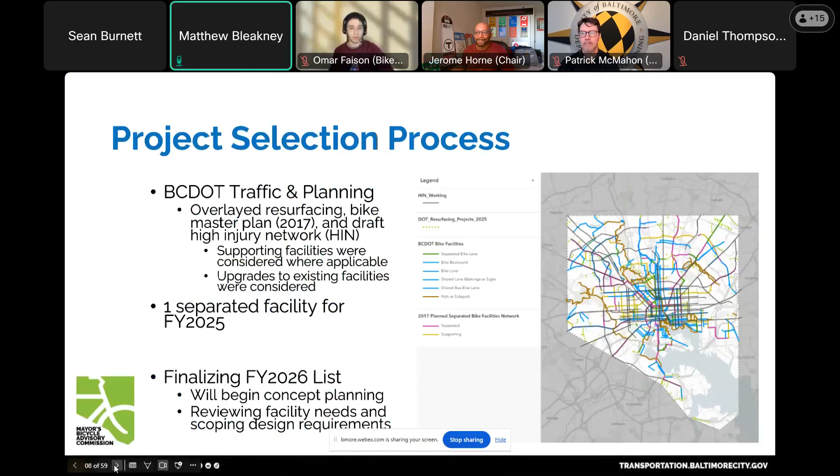All right, we'll move on to our bicycle projects overview with Sean Burnett.

Good afternoon everybody. So we're going to run through a map of some of the current projects that have to do with active transportation facilities. I wonder if we can pull that up. So as you can see, this is a nearly comprehensive list of all of the active transportation projects underway at the moment. Some of these have construction dates already.

Looking at January 27, the Mount Royal Avenue Road Diet - this is completing the portion left unconstructed by BG&E, anticipated to be completed within the next 12 months. We also have the Harford Road cycletrack extension, as well as the shared stops and bus bulbs, that will be constructed within the next 12 months.

And then you can see the next couple of projects, Greenspring, Washington, and Central Ave, right now are in various elements of late design, and we anticipate all three of those to be under construction by this time next year. The rest of these, feel free to take a screenshot, or I'm sure we're sharing this slide deck post meeting - this is a longer list of all of the projects that we have right now that are currently in some stage of design.

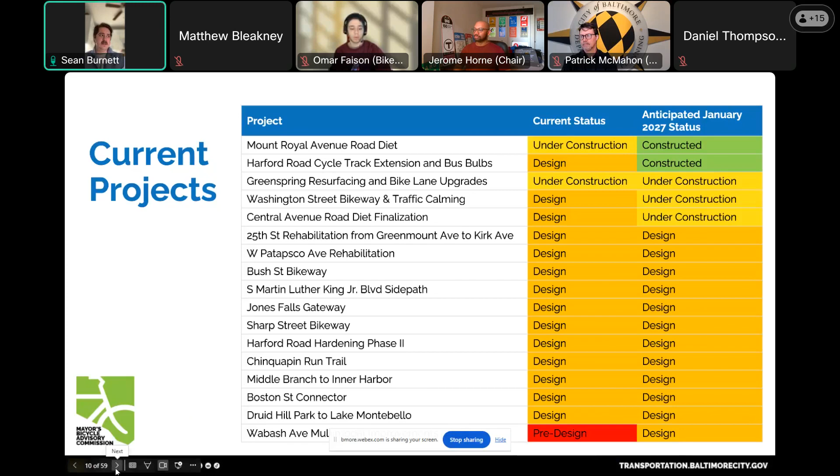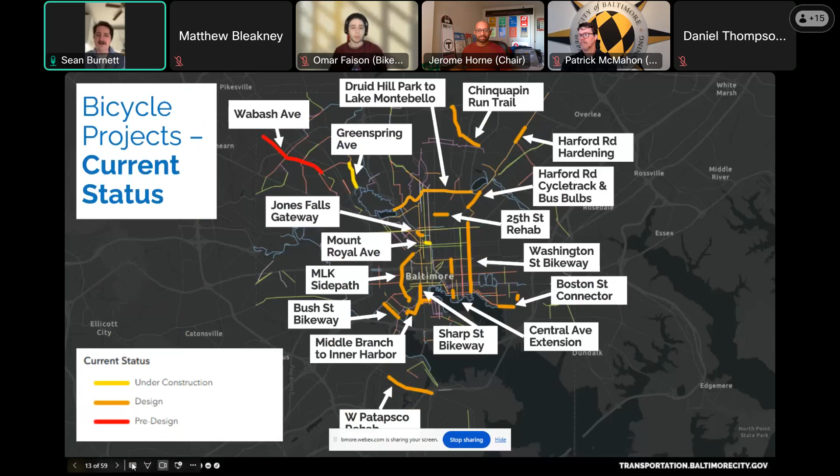Here we have an updated map of the existing bike facilities. Ms. Hanzlik and other members of our DOT team have worked hard to put this together. What's shown on screen is a map layout of the project work plan, showing all facilities currently under design or soon to be under construction, all identified. This is another accompanying map showing the anticipated status as of this time next year.

I failed to ask if anyone has questions for either Matthew or Sean related to the two items we just heard about. We'll take questions from the commissioners first.

This is Patrick. I had asked DOT to do something like this because at our last commission meeting it felt like there were updates, but they weren't necessarily connected. I think it's really helpful, and I appreciate DOT pulling this together so we have a better understanding of how the projects being developed fit within a system. But I think it also leads us to think about where things are missing and where the gaps are that we need to fill in. I won't say anything more.

Great, thank you, Patrick. Anyone else, any other commissioner comments or questions?

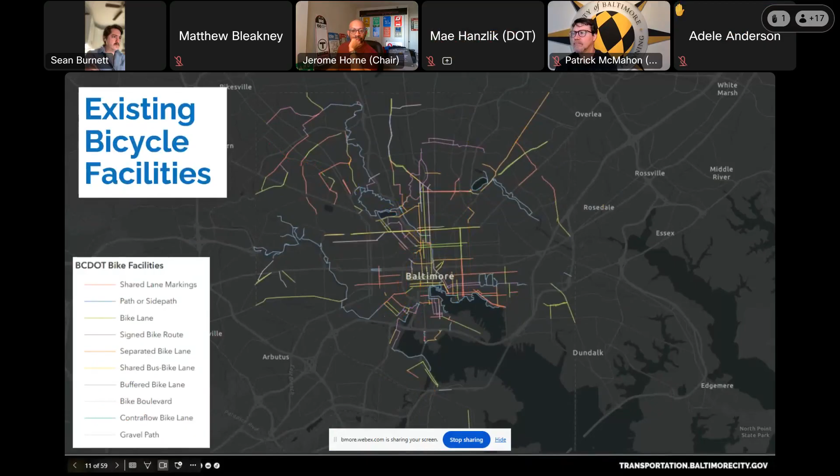Oh, thank you, that's a great question, Michelle. That's just referring to what we have existing as part of our network today. There are a variety of different types of facilities, which is why all the colors, but for this purpose we wanted to demonstrate what gaps we're anticipating filling within the next year. So the focus is really on the bigger, bolder lines in the following slides. Does that answer the question? Yeah, thanks, the slide that's up answers the question.

Okay, thanks, great. I'm also seeing in our chat that we've got Ursula and Tim. Are folks able to read what those chat messages are saying? Because on my side it says the message cannot be decrypted. I can't imagine anyone can read them. Okay, yeah, so, go ahead, go ahead, Chair. Yeah, so we have a question from Ursula.

Is there a plan to clean up all of the current and future bike lanes? If a bike facility has debris in it that would make it unusable, we would ask the community to submit that via a 311 request so our operations teams can go out and do some periodic spot cleaning. We're in the process of looking at our maintenance plan, specifically at obtaining new equipment that will make it easier to do regular cleaning of the bike lanes. But for right now, if you notice debris or obstructions, please submit that through 311 so it can be tracked and we can send our operations teams out.

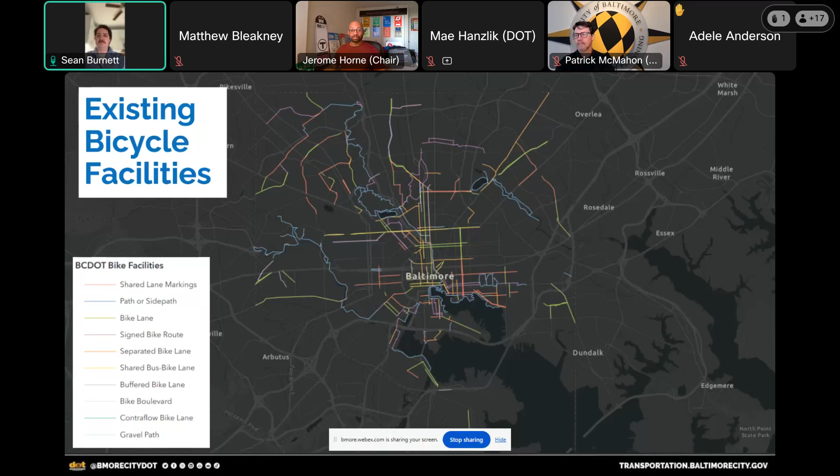We also take a look at our budget, and our budget is a large portion of what dictates the size and scope of some of the projects that we pursue. In the future, the hope is to overhaul that matrix and create a longer range capital plan that can be very specific about which projects people can expect from the agencies in ensuing years. But we're still working on that process and will likely be rolling it out as part of a larger effort to update all of our bike related programming.

Thanks, Sean. And we have a few more comments. There's a comment from Patrick: lots of red on this map showing sharrows or just signed routes that probably need upgrading. Someone was reiterating they were curious to hear about the process for selecting bike lane projects. Another comment from Patrick: there's some big gaps on the west and east sides. Another comment from Ursula: regular cleaning is vital, it's a lot of debris. Michelle: I would love to find some alignment with that, connecting underserved communities to access to care, hospitals, and pharmacies.

Any other questions? Is there a map? Omar asks, is there a map for only all ages facilities, given that this is the design standard for the current and future?

So there's a couple of different questions in there. To answer Mr. McMahon's, the agency has set aside some money that is specific for upgrading some of our facilities. We're going to be taking a good look at those over the course of the next 12 months, fiscal year, to try and decide where best to apply that kind of support.

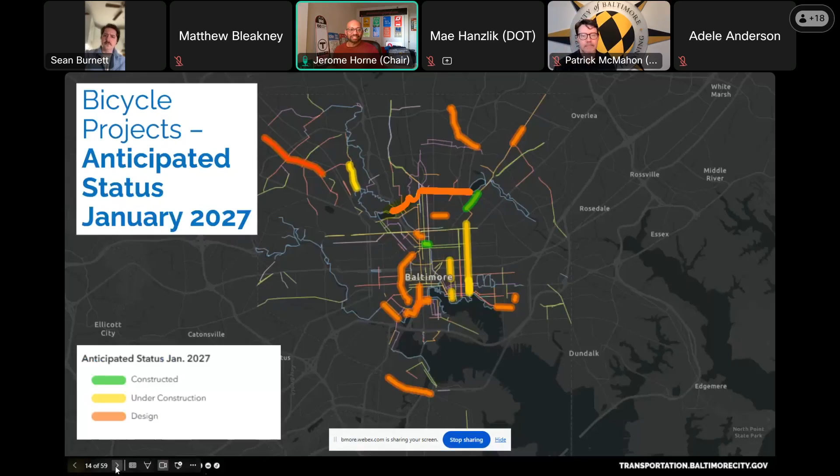So we're going to look at speed hump design and review, and we're going to hear again from our friend Matthew Bleakney.

Hey everyone. So just as a premise, this is part of a broader initiative to update the standards that you can find online, to create both more options for us, Baltimore City, to use in our traffic calming arsenal, and also just improvements we can make. So as part of this project, I'm going to go through it, and we'll start with what are bike-friendly humps.

Sometimes we see these things are slotted and all, so just a little background. Humps, I'd describe as using the grades and geometry and transitions between those grades to provide traffic calming, and make it bike friendly by making sure there's a smooth transition over that hump. So you're balancing traffic calming effectiveness with ease for a bike to navigate.

The cushions are where you see gaps in the cycletrack, and we'll have some picture views of this too, but essentially there are gaps for cyclists to go through, and we can also modify these gaps for fire truck usage. But we've got to balance the convenience of those gaps with making sure it's not possible for cars to go through there.

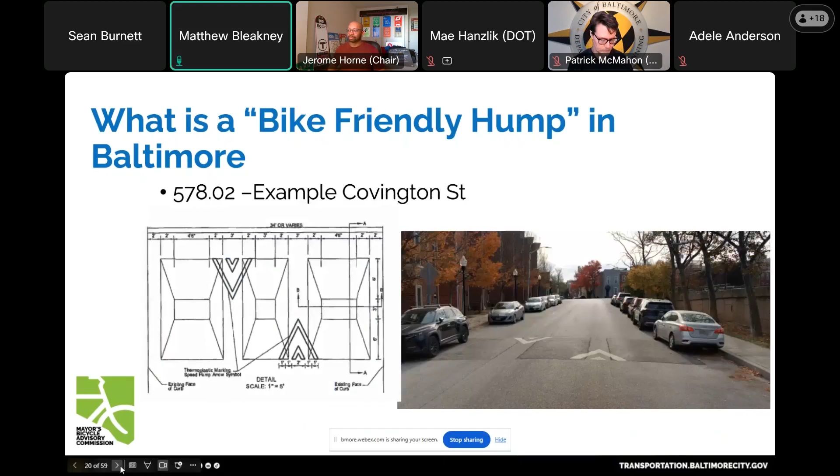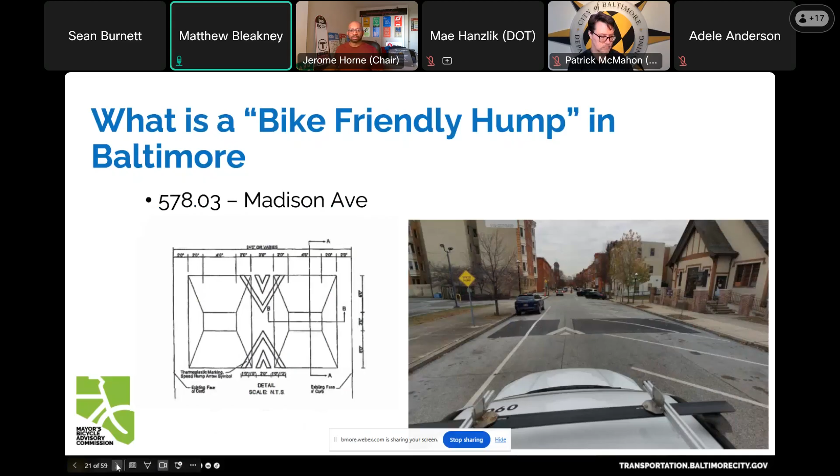Very similar to this is our Dash 03 design, which is designed to have only 1 cut through, so it's useful for one-way roads and also when roads are really narrow. The more cuts you put in, the wider that speed hump has to be, which restricts it from usage on narrower roads.

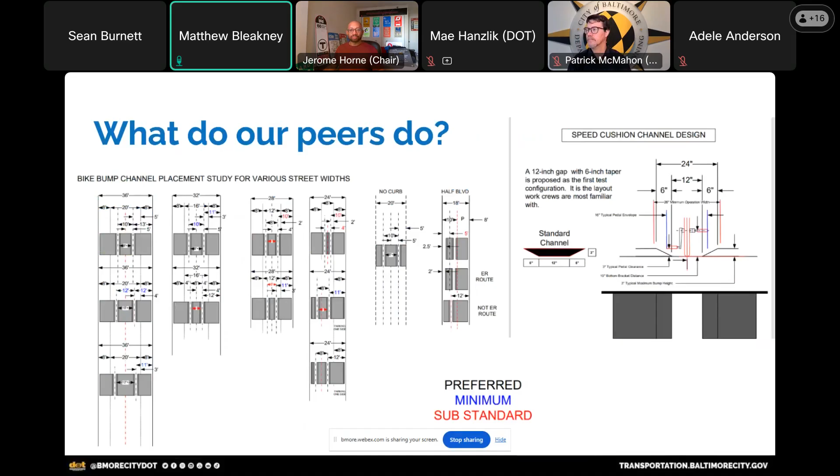As part of our redesign process, we looked at what peer cities do. We reached out to Portland, Oregon to see what they were using and what designs they have. On the left, you can see they move their cuts around a lot, giving more flexibility in their cushion design, and their channels are actually slightly smaller than ours. They did an in-depth study looking at what cycles can go through, including crank sizes, to make sure it wouldn't interfere with those cuts. The big takeaway is helping us, Baltimore City, reference what designs are possible, and especially for that channel design, understanding how we can tune in these cuts.

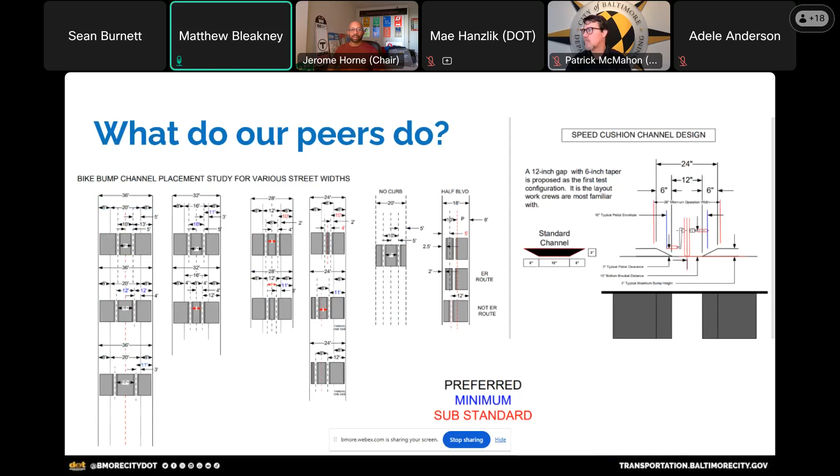So what changes are we looking at? Right now we are looking at that channel or cut placement and design. Our standard is 3 feet; if we make that cut smaller, down to 2 feet, it lets us use it on more roads with smaller road widths, while also making sure it still aligns with that fire axle. So it's a dual purpose here.

We are also looking at creating a standard design to help with ADA movement. A lot of times on certain corridors, the sidewalks may need a large capital improvement project, but we also need traffic calming. So at the speed humps, we're looking at adding flex posts to prevent people from parking there, allowing ADA users or bike riders to navigate around those flex posts and have access to a clear, safe space, especially for electronic wheelchairs. We've gotten reports from our ADA team that when they try to navigate even the bike-friendly humps, they can have a risk of tipping, so this would provide a space they could access.

And then that kind of goes again with the current reviewing of vertical grades. We're just reviewing those to make sure our standards are up to date and make sense. And then another slice of this is, on the engineering side, we're making these updates, increasing that arsenal of tools, but also working with our operational side to make sure they have clear guidance on when to use what humps and are adhering to the geometric designs. So that can be very hard sometimes out in the field. So just making sure we're communicating with each other to ensure Baltimore is getting its best.

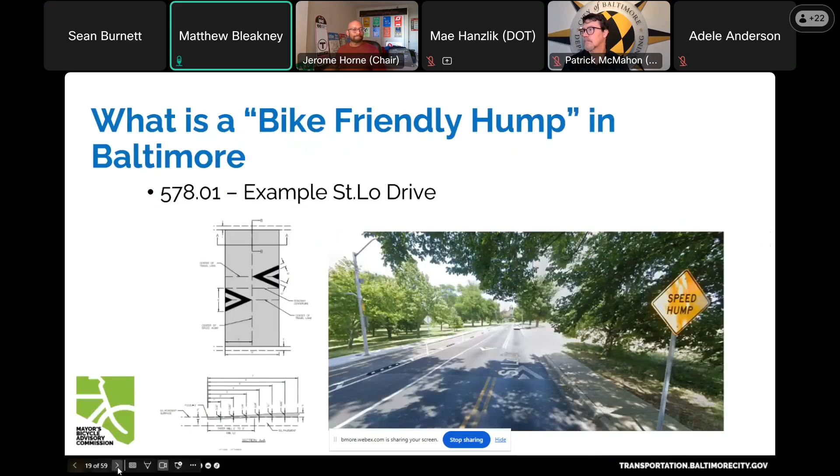Hi, so a little bit timely on that. I had been thinking about even some of the best facilities we have, our existing cycle tracks, having some design challenges that need to be addressed and that can make our existing bike facilities much better. The two things I'm going to highlight here are the right or left turn on red signage and drainage.

So if we can skip to the next piece. I looked at 3 different sections along 3 different roadways where there are right or left turn on red signs that allow people to turn across cycle tracks for large portions of the day. This is a place right by the prison at Fallsway and Madison.

For most of last year, I was working Sunday mornings at the farmer's market, and I would come through here around 4:30, 5 o'clock in the morning, and would really be hoping and expecting that people weren't going to turn across and hit me.

But I find it concerning that our existing signage along cycle tracks often allows people to turn across, 7 a.m. to 7 p.m., or 7 a.m. to 4 p.m., or something like that.

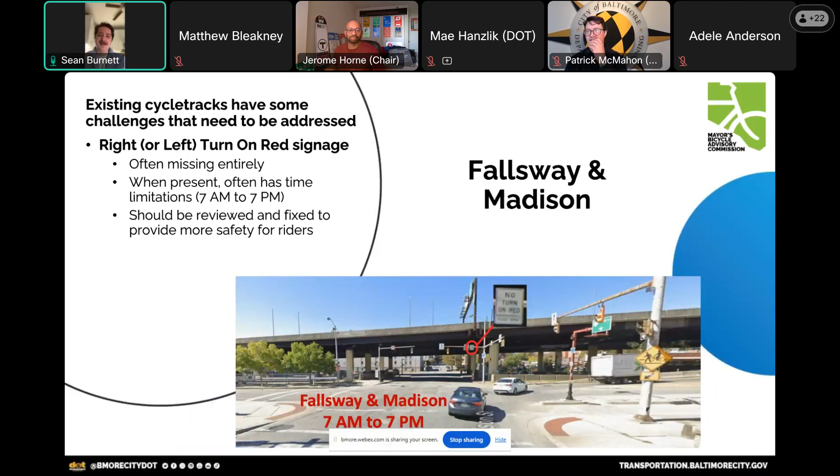Some of these, like Fallsway and Madison, and the block on Maryland, don't have a lot of storage. So if there was significant ADT, I could see some issues. But I'm very familiar with both these intersections, and I think now, looking at them, we can safely move past some of those considerations.

So what I'll do is have Mr. Bleakney take note of some of these offerings, and maybe this is something we can coordinate with traffic about, to identify some of these for modification in the future.

Thanks, Sean. And I know this is not a comprehensive list, I just grabbed 3 that had relatively good screenshots from Street View. I'm not aware of the city being in possession of a comprehensive and updated sign inventory for a lot of our stuff. So this will likely be a moving target, something that, as they're brought up and brought to our attention, we can take a look at, determine whether or not they're really necessary, and make those modifications.

I'm happy to take an afternoon to ride around with Mr. Bleakney. That sounds good — wait till it warms up a little bit, boys. I was going to say, Sean, I'll go down in the snow.

Yeah, I can definitely note what you said, Sean, and look at some of these that are presented or in the chat on a case by case basis. If you're okay with me answering to the crowd, or Patrick, for DOT, I think to make this a larger scale effort would require doing a further analysis or a case by case check on each of those intersections. So it would be a larger scope effort, is what I'm trying to say.

And then right here we have kind of the breakdown by street, and you can kind of see on the map those yellow dots indicate sort of the highest density areas where tickets were issued. And there's the last slide with all of it together.

Great, thanks again, Sean. Are there any questions or comments from commissioners? We have a question in the chat.

How do citations occur? Can bikers report cars parked in the bike lanes, or do cops have to see it themselves? Great question. So cops traditionally don't issue parking citations. That is the job of our parking enforcement. And the way that you can request citations or bring these to the enforcement's attention is through 311.

And in relation to 311, what is the typical response time for a 311 request for a parking violation? Great question, and one that the administration has been dutifully asking the agency. We are working on refining our process right now.

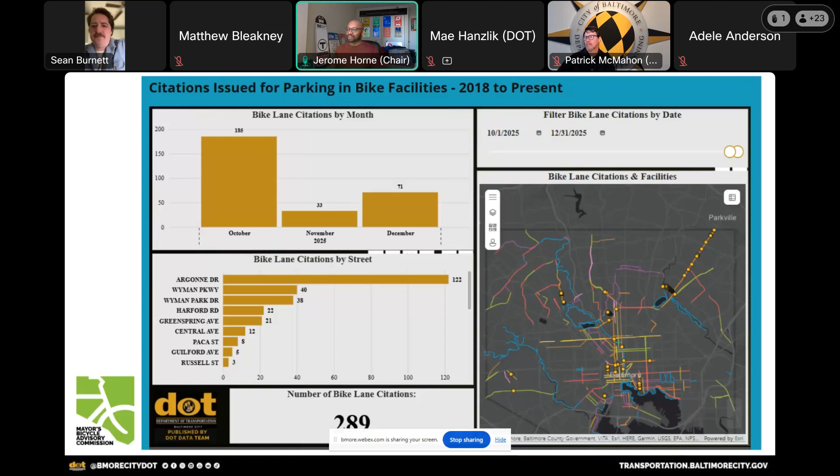Great tidbit, Mae, thank you. Okay, I think we can move ahead to our next section. So we're going to get a micromobility update from Tyler Smith of our dockless vehicle program at BCDOT.

Hey everybody, I turned my camera on, but I'm showing a blank screen on my screen. Not sure what that's about, but anyway, hello. We had a big year in dockless vehicle trips. That is the shared e-bikes and e-scooters provided currently by Lime and Spin in Baltimore City. We eclipsed 3 million trips for the first time in program history, nearly doubling the previous record of 1.7 million trips in 2019. I know this is a bike-focused meeting, so the e-bike trips were over 450,000 of those trips.

So roughly 1 in 6 trips are e-bike trips. And a lot of that has to do with the significant number of new e-bikes that Lime brought to the market in the middle of 2024, and just people really taking to using them quite consistently. Interestingly, also, the average distance of a trip on the e-bike is higher than on a scooter trip. It's closer to 1.5 miles.

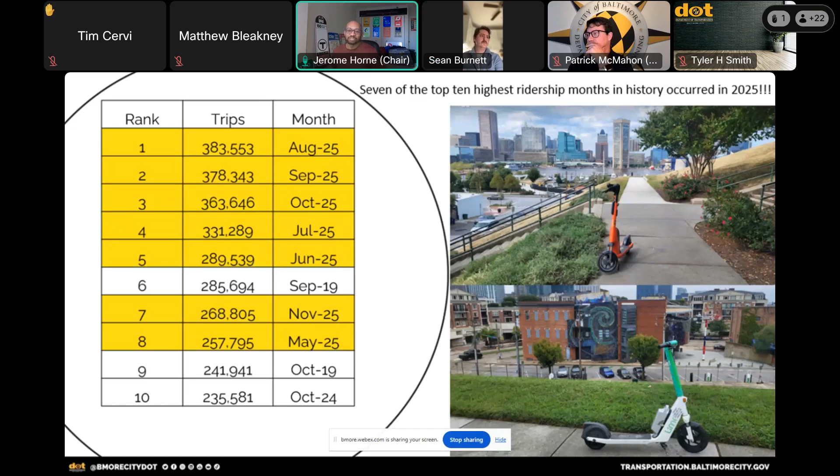And then Michelle, I see you have a question or comment. Would you like to come off of mute and speak to that? Yeah, good evening everyone. I can come onto video as well if that's useful, if that's gonna work. I'm not sure.

As you all know, I run the Baltimore City Health Coalition, and part of that is a citywide collaborative. This is the hospitals who take lead on population health, getting patients the indirect services that they need to get into the hospital, to address social determinants of health. Now that the micromobility access program has been on my radar for a couple of months, we have talked to the hospitals about it, and they are interested in having someone come and discuss that program with them if that's possible. Also learning how we can support getting more registrations into that program. So anyone that would be interested in coming and talking to us, I think the next meeting would be in February, and I can give more detail on that.

Yes, I would like to. And I would also like to be involved with that.

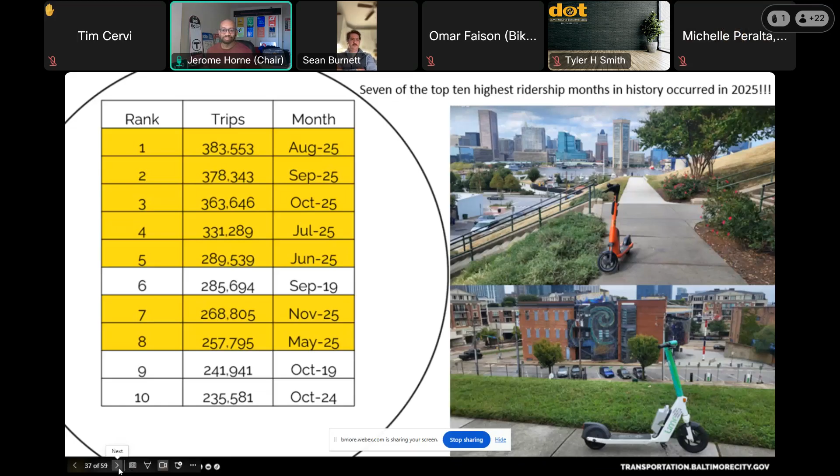Okay, we're going to move on to our Bikeable Baltimore Region update and next steps from Charlene at BMC. Thank you so much for having me today. I'm Charlene Mingus, the Active Transportation Planner at Baltimore Metropolitan Council, and I'm going to give you an update on the Bikeable Baltimore Region plan. You can go to the next slide.

Bikeable Baltimore Region, or BBR, is a plan to create a safe, connected, and comfortable bike network that serves the entire Baltimore region, with the goal to provide people of all ages and abilities the option to bike where they need to go, including transit, schools, parks, jobs, and other essential destinations.

From 2024 to 2025, BMC and the Baltimore Regional Transportation Board worked with community members, advocates, and government partners at the local, regional, and state levels to identify this network. That network is made up of existing bike lanes and paths plus future routes from adopted local plans throughout the Baltimore region.

I want to emphasize the BBR plan does not propose new infrastructure. Anything included in the regional network must already be in a local plan, and the local plan would not replace local priorities or override community input. Next slide.

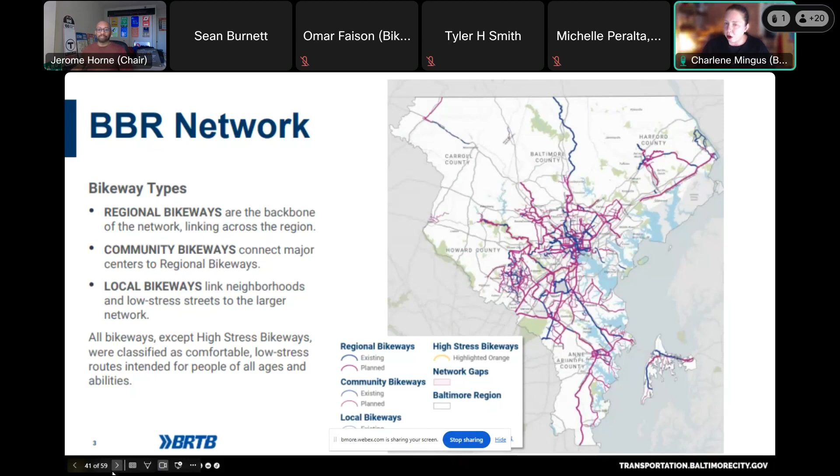The next slide is a zoom-in on Baltimore City so you can see a little more detail. I'll follow up at the end of my presentation with a link to our website and story map where you can explore the maps on your own time and get a more detailed view.

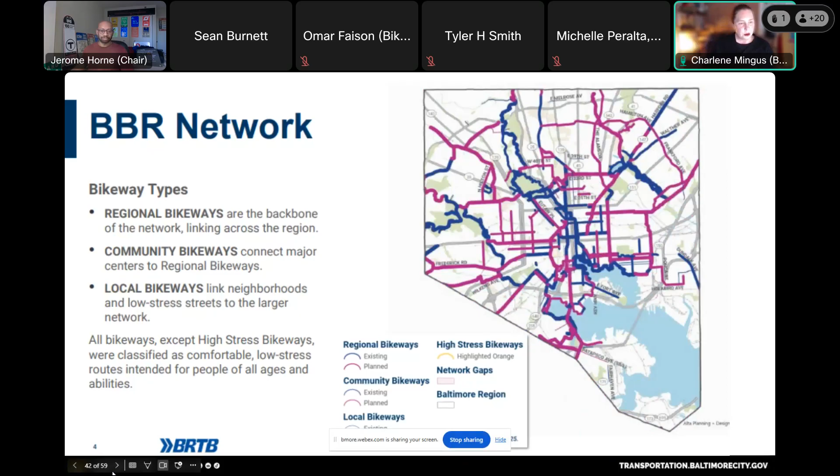On the next slide, another part of what the project team did is identifying potential improvement areas. These include high-stress bikeways where existing or planned routes may be stressful to bike on, but could provide key connections as safer options are added.

We also looked at areas where there were network gaps or areas that can improve connectivity but where bike lanes or paths are not fully planned. You can see those in the light pink circles and ovals there.

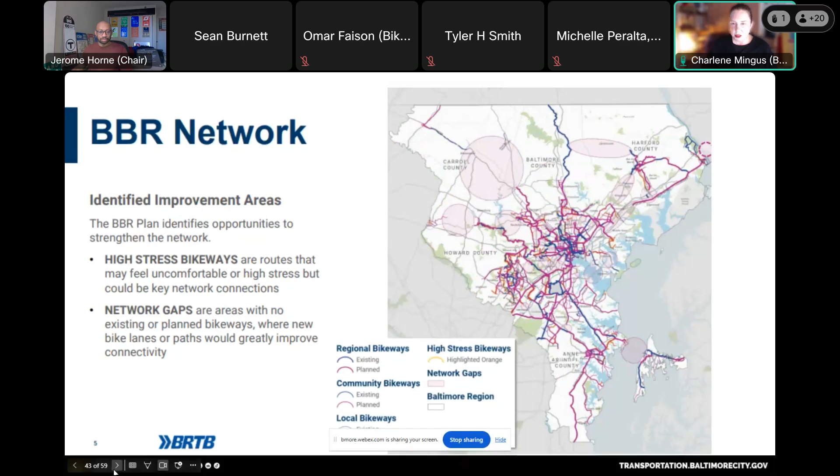We recognize that while the network includes many safe and comfortable routes, it's not fully connected. The BBR effort will continue beyond this first phase as the region works together to close the remaining gaps and update plans over time. The next slide gives you a Baltimore City zoomed-in view.

The vision for the BBR network includes a little over 1,100 miles of existing and planned bikeways, including 782 planned bikeways. We looked at the transformative impact that a full BBR network could have on the way people live, work, and travel across the region.

We conducted a benefit cost analysis to quantify the annual benefits under select categories, including environmental sustainability, state of good repair, economic competitiveness, and quality of life. We saw a total of $121.9 million in annual benefits from a full network, and these numbers were largely driven by projected new biking demand from residents living within 3 miles of the planned bike lanes and paths that make up the network.

As I mentioned, completing the BBR network would take around 780 miles of new bike lanes and paths. To help prioritize this effort, projects were categorized based on their current level of progress. Projects with a concept plan, feasibility study, or design underway or already under construction as of September of last year. They've received the most investment and are most likely to move forward first. These were classified as filling priority gaps, with an imminent project subcategory for the most advanced projects expected to begin construction in 2 years.

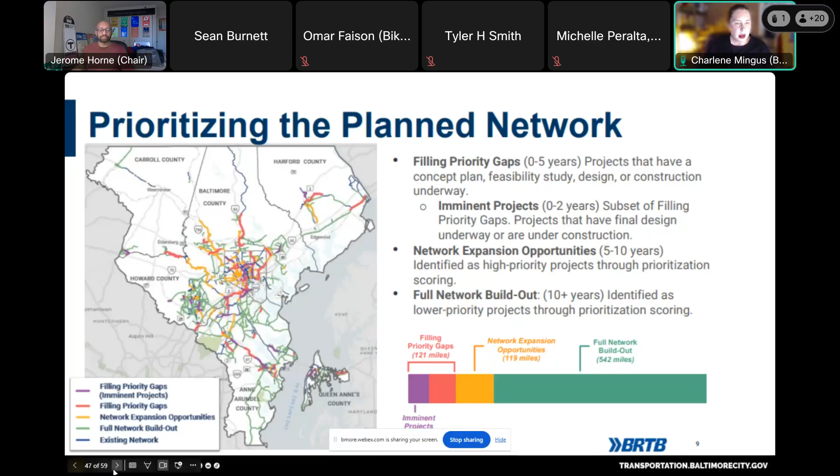Getting into what we've completed: the BBR plan was adopted by the Baltimore Regional Transportation Board in November 2025. We also launched the BBR plan website and our story map, including interactive maps and a scroll-through overview of the key priorities and projects, so you don't have to parse through the big plan.

The next steps include providing technical assistance to support 30% design for high priority BBR network projects, launching a grant program to help local jurisdictions update bicycle master plans and advance a regionally connected network, and looking at potentially some of those high stress bikeways and network gaps.

We're also looking at developing uniform design standards for the BBR network, looking at low stress bikeway best practices, MDOT complete streets policy, and local guidance. We'll also be tracking project implementation and performance outcomes for the BBR network, so we can see how we're advancing as a region in building out this network.

We'll also be working to establish a regional working group to coordinate the BBR network implementation across jurisdictions, because we know we want to build those connections from Baltimore City out to the county and then out to the other jurisdictions that make up the region, and then connecting out further beyond the Baltimore region.

We will also support the local Safe Routes to School program initiatives to help improve youth safety and access.

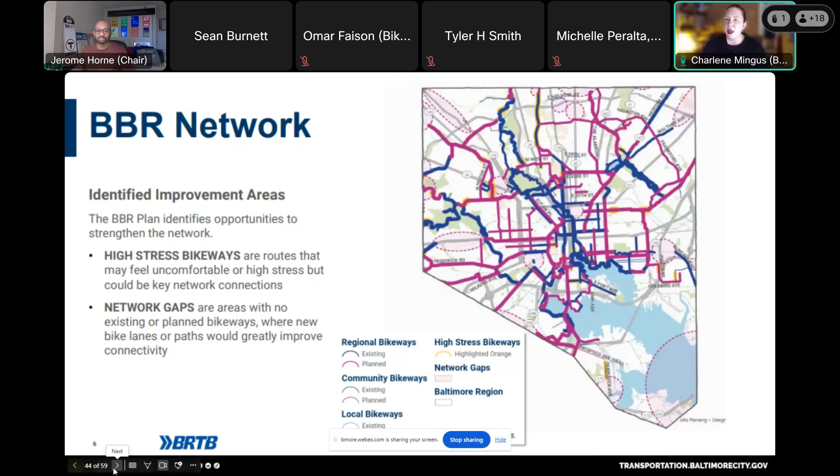That kind of clarifies it. I know it's a lot to take in. It's a lot of information, but the story map is a good way to take it in on your own time and explore things. And of course, we have our contact information if you have follow-up questions once you look at that.

All right, thank you again, Charlene. I think we want to stay on time here, so we'll move on to our next section, which I'm really excited about myself personally, proposed MBAC bike rides with Patrick McMahon.

Thanks. So this came out of a couple of different things. I led a bike ride for some of the staff in the Department of Planning recently to go see the newly hardened Big Jump and other bike facilities around the city. And on that ride, one of my colleagues, Austin Davis, who used to serve on the MBAC, mentioned that there had been a bike ride of MBAC members several years ago.

He said it was really a helpful thing, in part because at that point, I don't think there were as many of the engineering staff from DOT who were familiar with or had gone out and ridden on some of those routes. As a result, there were folks that were like, wow, this is really scary. And it's like, yeah, that's the point of bringing you out here, to show that this is really scary and this is why we're interested in doing some of these things.

At the same time, that's a little bit of a challenge in terms of making sure that we don't create a ride that's not safe for folks to go on. But the idea is to get all of us out in the field and taking a look at things. You can go to the next slide, or maybe it's just more on this slide.

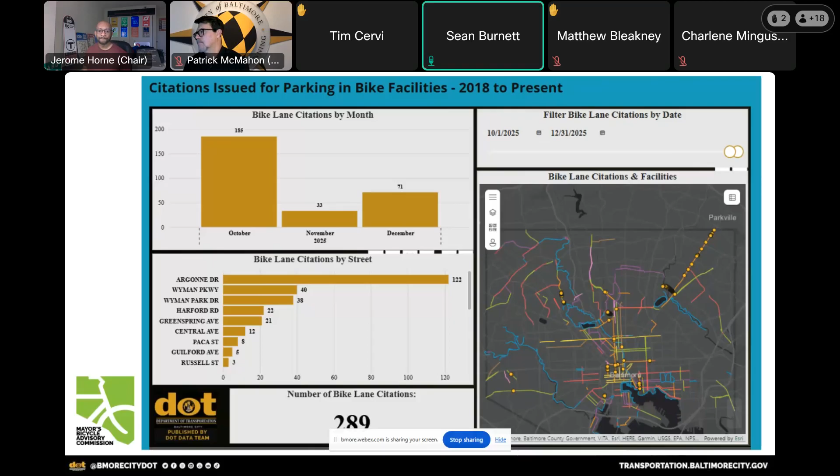Thanks for that question, Tim. Yes, the city is looking at upgrading existing facilities. Are the citations a factor in that? No, not at this time. Okay, I think that would be helpful.